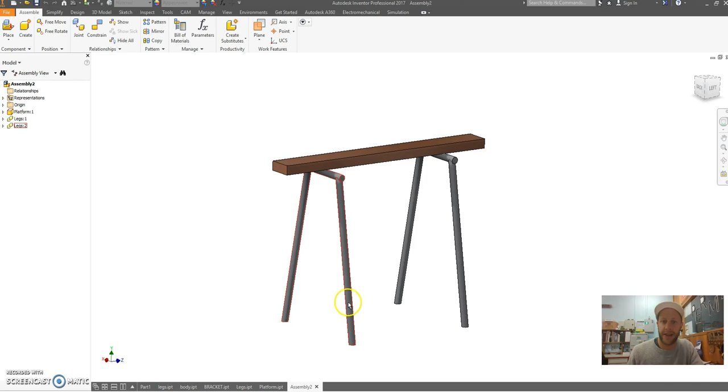This little video, I'm going to show you stage 2 of building our trestle stand. Okay, we've got the basic detail here. Now we need to start increasing our detail. Let's grab the platform. What we're going to do here is add some holes to this.

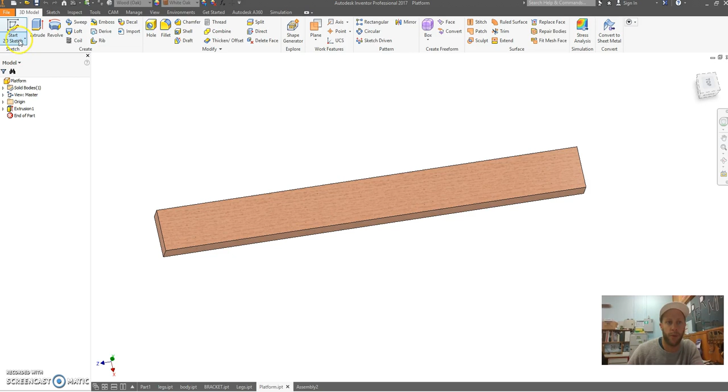So on our model here, there are some holes. Now, because there's a larger hole at the top and a through hole which goes all the way through, that's actually called a counter bore hole. So we're going to create a counter bore hole. Okay, start with a sketch, choose your top face.

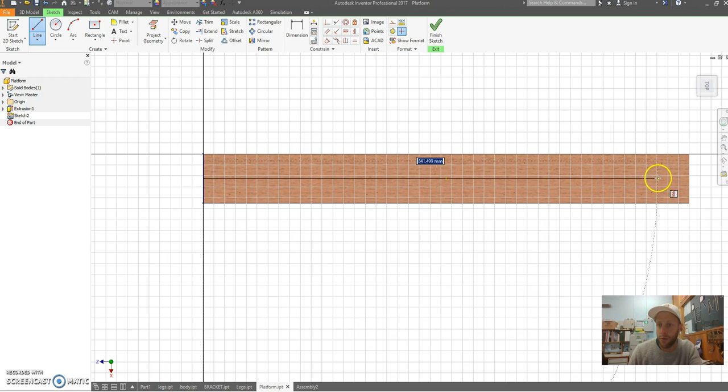Now I always want this to be along the center line, so I'm going to get a line and I'm going to create a reference line so I can snap to the midpoint of this, run it all the way to the end, and also a line through the middle.

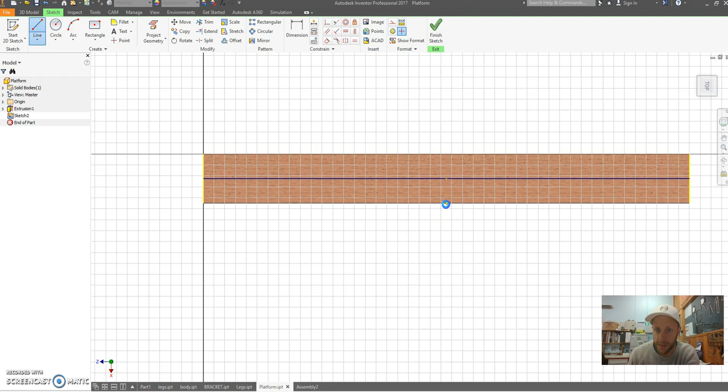So press escape to get out of there. Now that one didn't quite work. You've got to make sure that when you're creating your center line that it snaps to the green point. There we go. It should change the color to tell you that it's constrained. Okay, right click construction, click on the screen, right click construction, click on the screen. Now this gives us some reference now to do our holes.

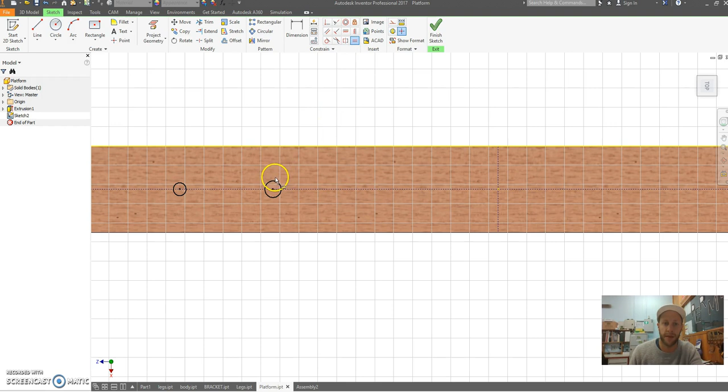So I'm going to do a hole on one side, so on the center line here and another one here. Now use the equal constraint to make these two holes the same, so equal and equal, and this hole is going to be 8 millimeters in diameter, and the distance between these two holes, center to center, is going to be 65 millimeters. Beautiful. This is a symmetrical part.

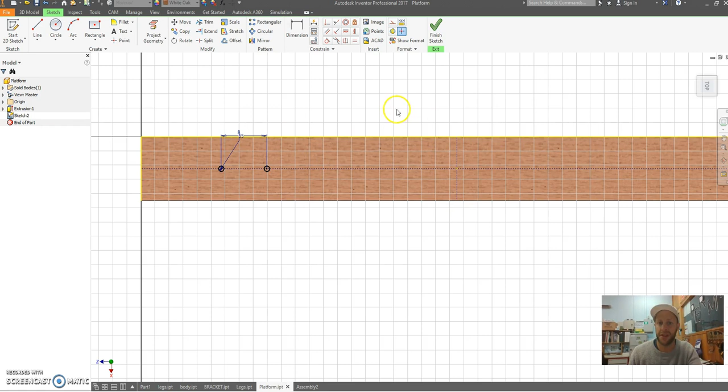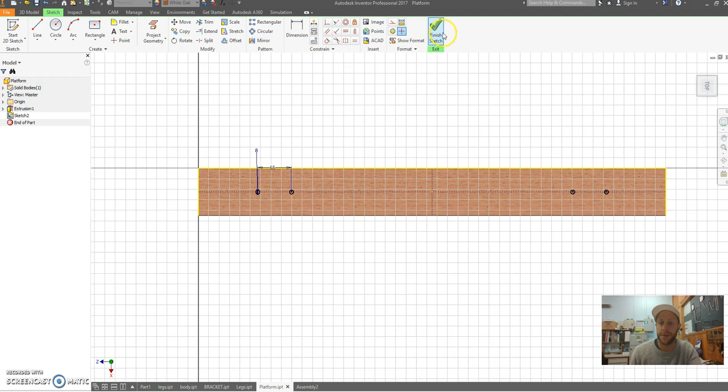So the reason why I drew this center line here is that I can now do a mirror. So if I click on mirror, this is the bar here. So I want to mirror this circle and this circle. Click on mirror line. I'm going to mirror about this center line and press apply. And hey presto, I get beautiful holes. Finish your sketch, extrude.

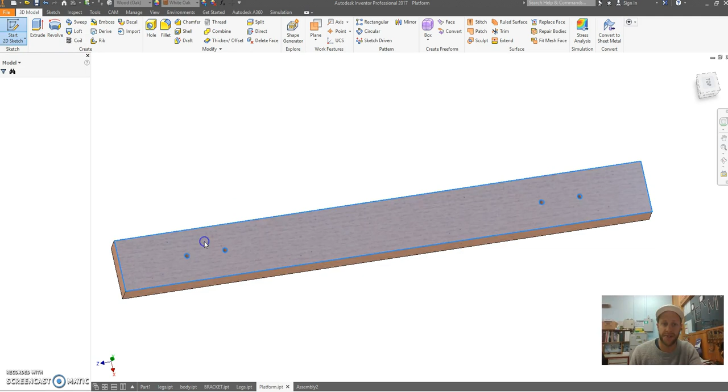So you can click on your 4 holes that you're going to extrude, and I'm going to make them a cut, and I'm going to go distance, I want to go all. It's going to cut through everything. Okay, excellent. There's my 4 holes. Now to do the counter bore, I'm going to do another sketch. Now that these holes are here, life is a little easier.

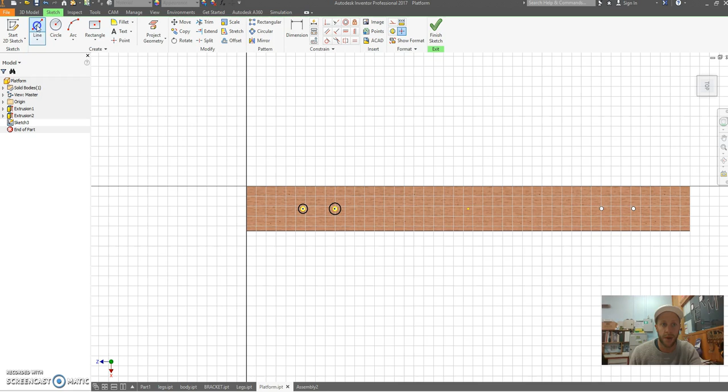What I can do is I can snap now to the center line. If you hover over that circle, you should be able to click on the center and then draw your circle. So hover, click on the center and draw your circle. Now again, it's symmetrical. So to help me, I'm just going to draw a center line from that point there. I'm just going to draw up into space. Make sure it's vertical. Doesn't really matter that this line goes off into space. Just make sure that it's vertical. So click on it and drag it.

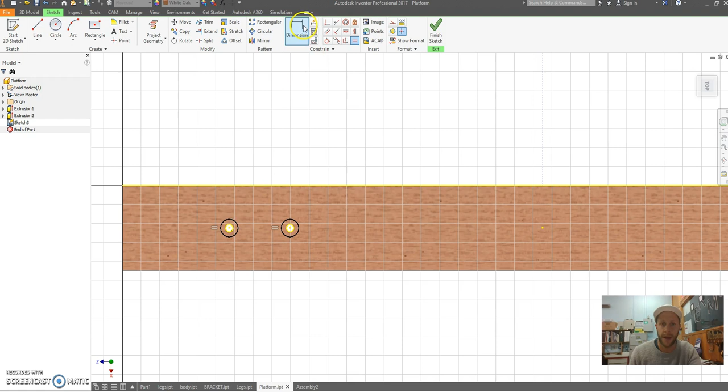Again, right click construction. Now I want these two holes to be equal, and I know that the diameter is going to be 20 millimeters of this counter bore. Okay, don't forget our mirror, circle, circle, click on your mirror line here, I go apply, and you should have nice 4 circles. Finish, extrude.

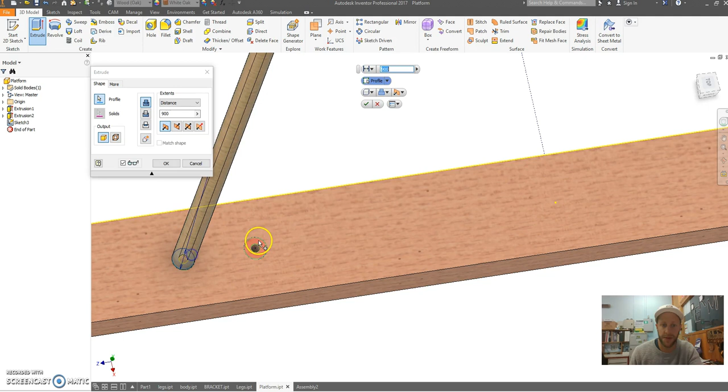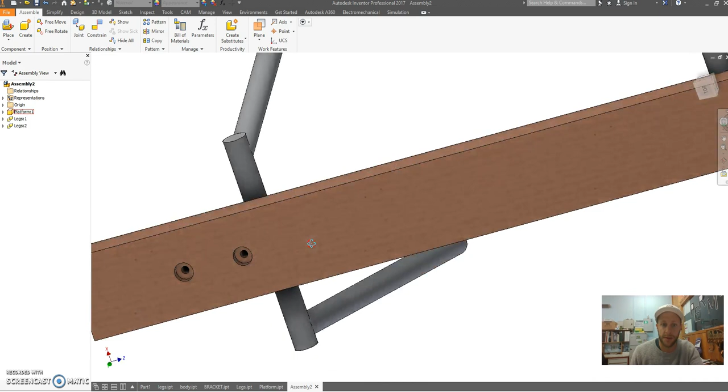Now again, we're going to use these 4 outer holes. Make sure you click on cut, and these, according to my drawing, are going to be 7 millimeters deep, and go OK. And there we go. There's our counter bore holes. Save your part. Let's go back to the assembly and have a look. All right. So those counter bore holes are on the top, which is correct.

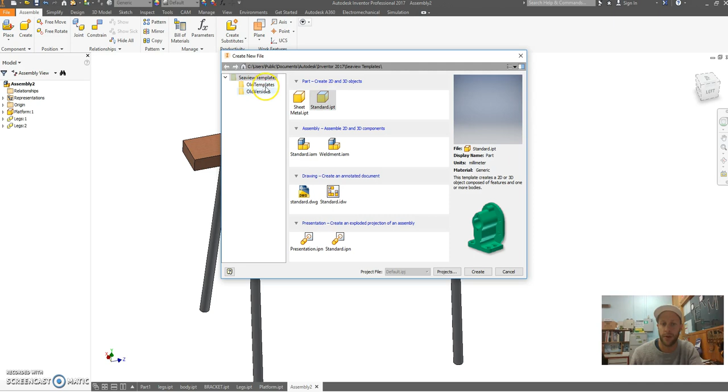That looks good. Okay. Next, I'm going to model up a little bracket here. So this little bracket is what is going to hold the legs in place. So let's model that. So we've got to create a new part. File, new. Always check, as I tell you, that you've got a standard. Yours might look different to mine. Just double check it's got millimeters. You must have millimeters as your part.

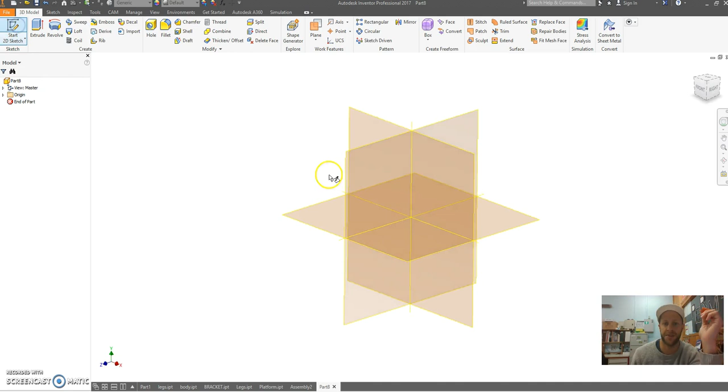Let's create it. Now, for this part here, always good to have a look at your model before you create it and go, well, what's the easiest way to build this? This for me is a single easy profile from the side. So I'm going to build a side profile. So let's start with a sketch. Click on a plane.

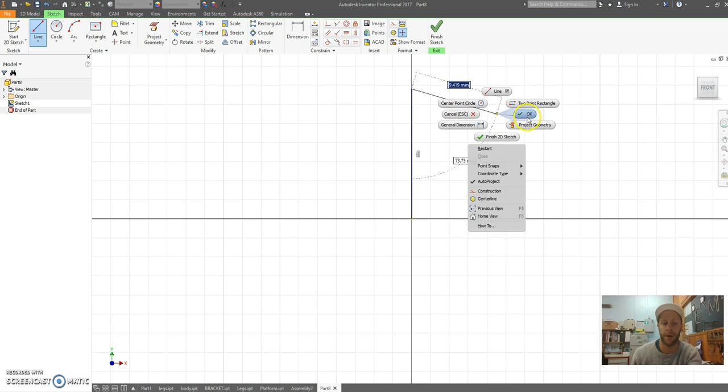And let's start. So as I always recommend for you to do, for parts symmetrical, let's make life easy for ourselves and model it around a center line. So I'm going to draw a center line, make it a construction line. Now I'm going to draw along this axis, this detail here. I'm just going to draw it like a rectangle for starters.

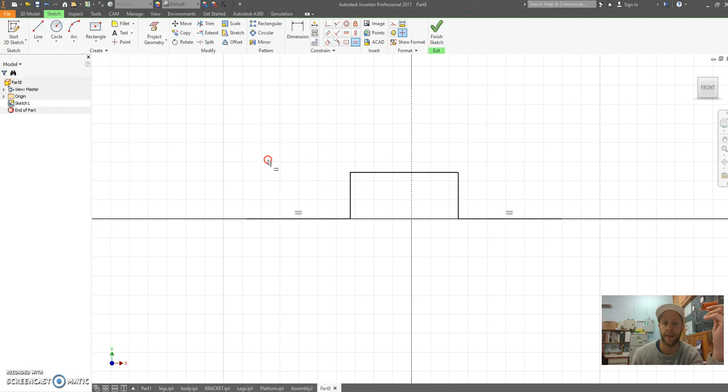Now it's a little hard to see with my black center line there, but I'm going to make this line and this line equal. This one and this one equal. No, it's already got that constraint. Beautiful. So I can move this around now. Now that kind of looks right, except the top bit's an arc. So I'm actually going to model in an arc. So put in your arc. This line here, you can make a construction line now.

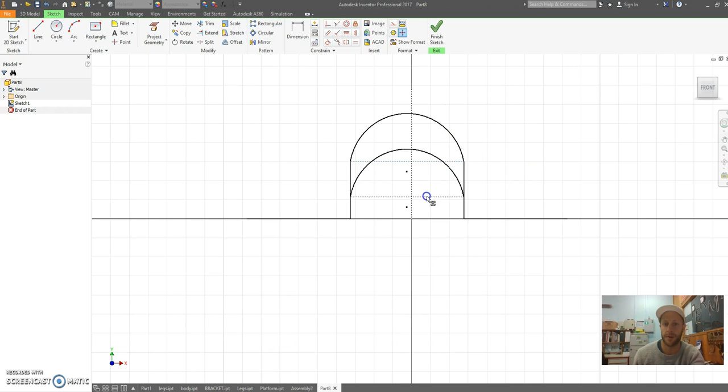Now, one thing with an arc, if you zoom in here, you'll notice that there's a sharp corner there. To make that a nice continuous curve, there's a little tool here called the tangent tool. And this makes a line touch an arc. So if you click on those two, that one and that one, you only have to do it once. This gives you a nice tangent arc.

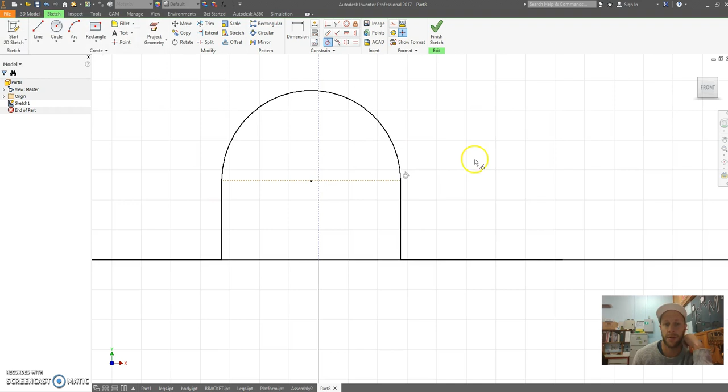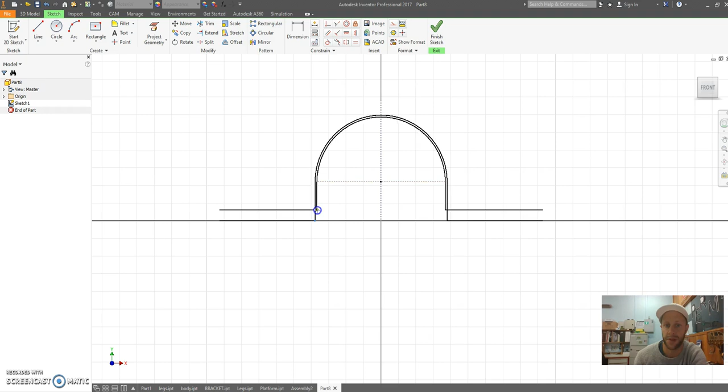Okay, beautiful. Now I'm going to put this point here. If I use the coincident constraint, this will attach a point, this point here, midpoint, on this line here in the center. So that now should be fairly centered. So you can always drag it and see what's going on.

Now this line here, I want this all to sit along the center line here. So I'm actually going to draw another reference line. I'm going to draw a line from here to there. Now what I can do is I can make that line there horizontal. Escape, make it construction. By making that line horizontal, my part is now nice and symmetrical.

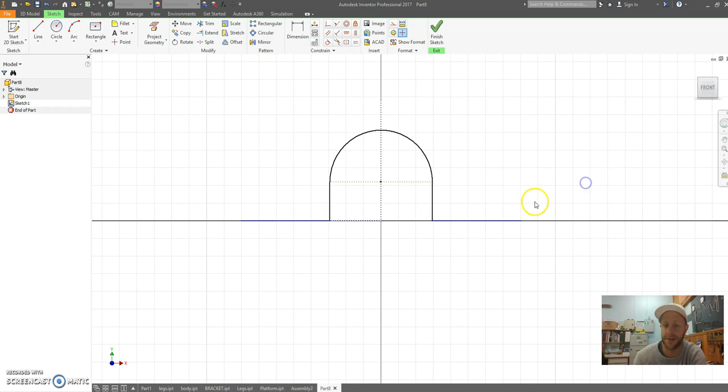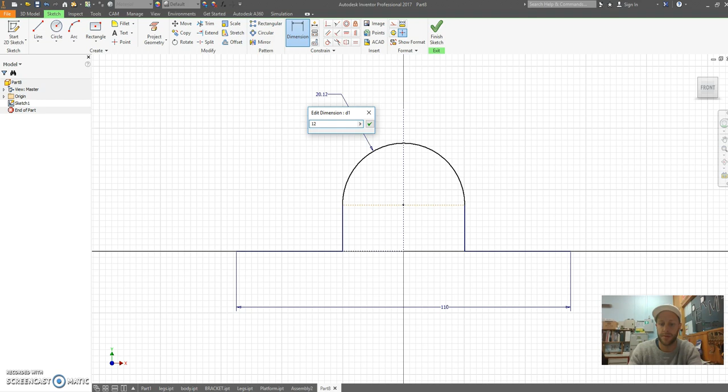All right, let's put some dimensions on. I know that my overall part length from here to here is 110 millimeters. That scales the whole thing. This arc here is going to be, it's 25 mil diameter on the inside, so I'm going to make this 12.5 as the radius. That should be about right.

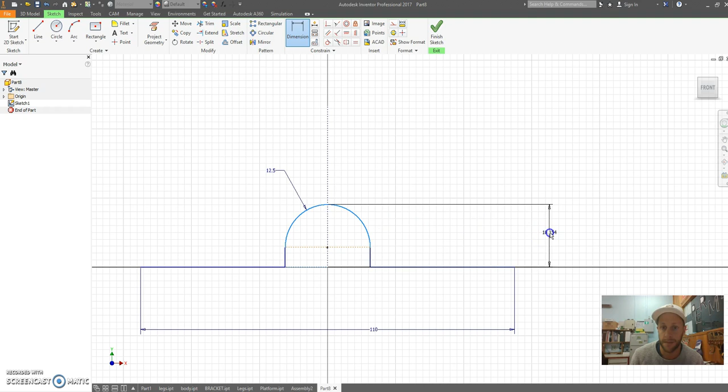And this I'm actually modeling on the inside of my shape. So if you see my screen here, I'm modeling the inside line. We'll see what we'll do in a sec. What I'm going to also need is a dimension from here to the top of the arc. And I've measured this one here, and it's going to be 25 millimeters from there to the bottom. Beautiful. All right, then my overall dimensions. Now these all change color, so they should be constrained.

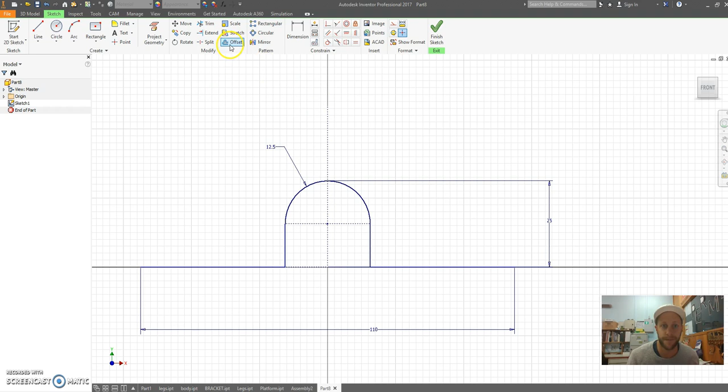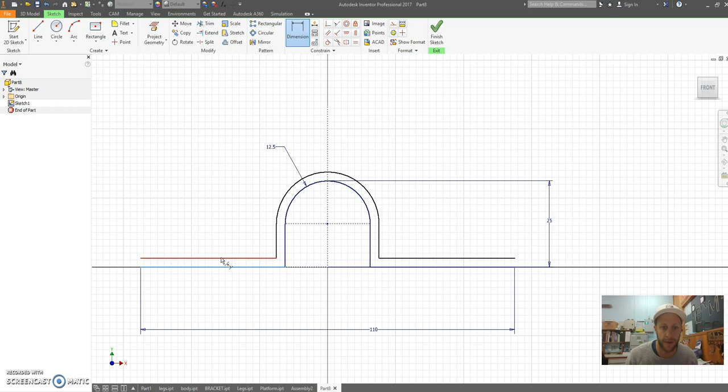Next step, I'm going to offset this line here. So I need this to be a solid. Click on offset. Now that this is all constrained, if I click offset, you will see that I can build the thickness of my part. Now I didn't actually measure that. I'm just going to quickly run my verniers across. This is 2 millimeters thick. So what we can do is just click, then press a dimension, and I'm going to go here to here and make it 2 mil thick.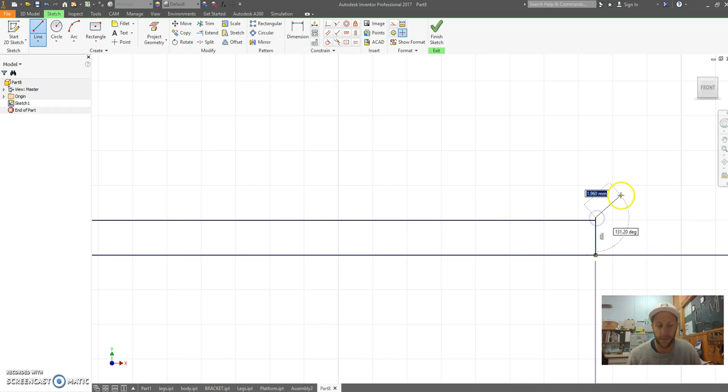Now, you'll notice that this beautiful offset is perfectly offset from my inside line, but I need to close up these ends because it's not a closed loop. So I can just draw a line between there and there, and at this end, between there and there, whoops, missed it. Just escape and go back. Line between that endpoint and that endpoint. Excellent. That's all closed. I can extrude this.

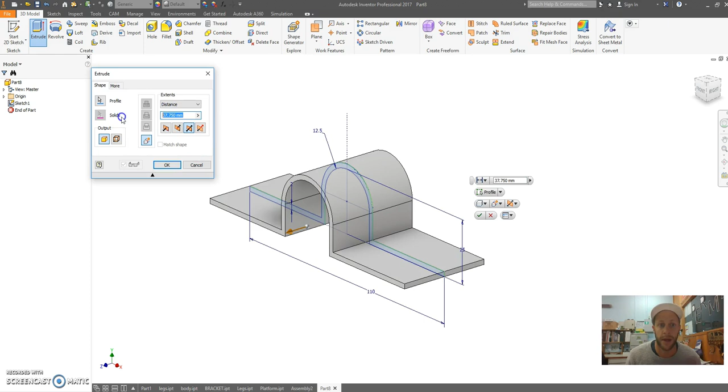So finish your sketch, press extrude, and we can make this. I like to make it mid-plane, and we're going to make that, how big was it? It's 50 millimeters.

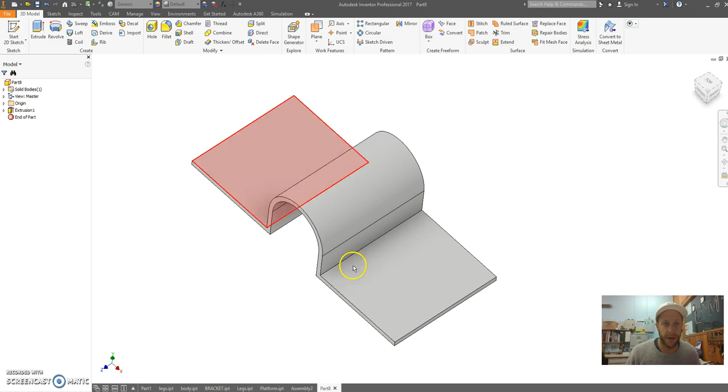Beautiful. Brackets coming together. Now, you'll notice that on this one, it's got a nice arc on the inside. I'm going to add that as a secondary feature, and on the inside it's about 10 millimeters. So I'm going to fillet it. I'm going to do a fillet of 10 and 10 on the inside here, here and here, and I'm going to make it a 10 mil radius.

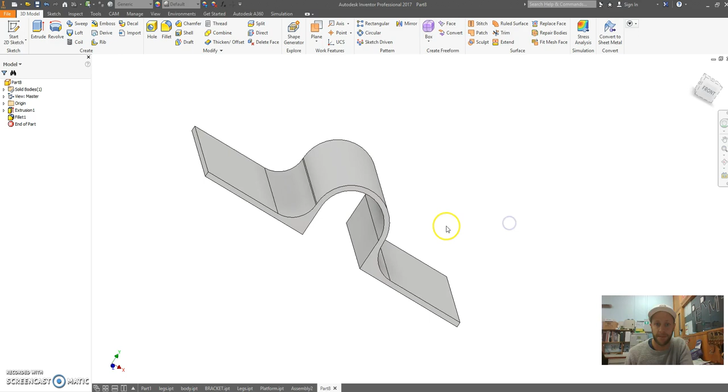Whoops, stuffed it up. Right click, edit feature, 10 millimeters. Okay. Now the inside should be 10 millimeters plus the 2 mil thickness. So that's going to be 12 millimeters from this corner. So click on that edge, and okay. Now that looks pretty good.

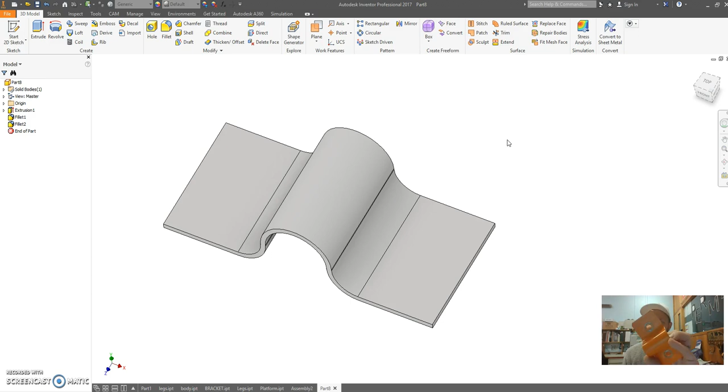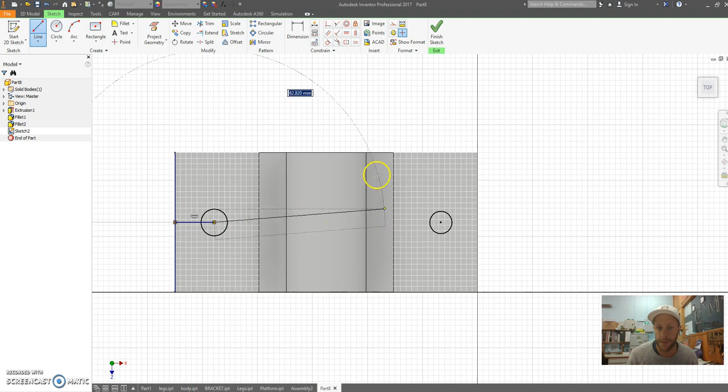Now, next thing to add on my design are these holes. So I'm going to do a sketch on the top. Now, I'm just going to model 2 rough holes out here. And to help me constrain these, I can draw some construction lines. So I can pick up the center line here and draw it to there. Escape. I can draw a center line from here to here. Also make that construction, make that one construction.

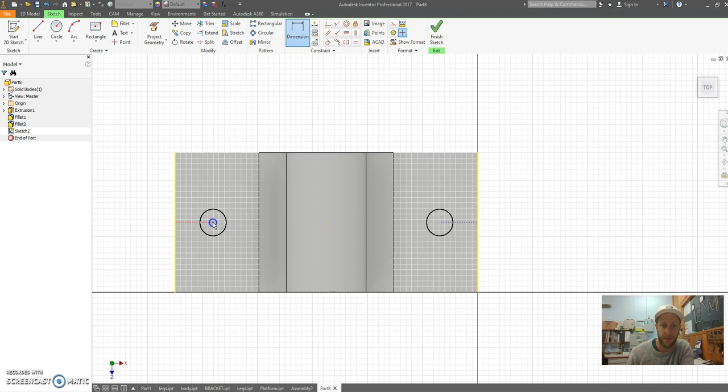Using my geometric constraints here, I can say that I want this hole and this hole to be equal. I want this line and this line to be equal. And this is starting to take shape. Dimension from the center of this one to this one. This needs to be 65 millimeters to fit up with my other design. So just double check, 65, yeah. That needs to fit into our timber.

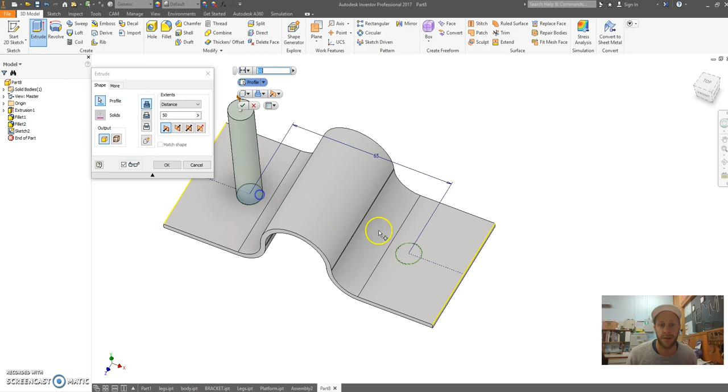So 65, done. Extrude on this hole and this hole. I'm going to cut it. I'm going to go through all. Done. Beautiful. This part looks almost the same. It just has a chamfer in the corner. So you can go and add a chamfer. You can check the model. That should be in those corners. I'm just going to leave it off for today.

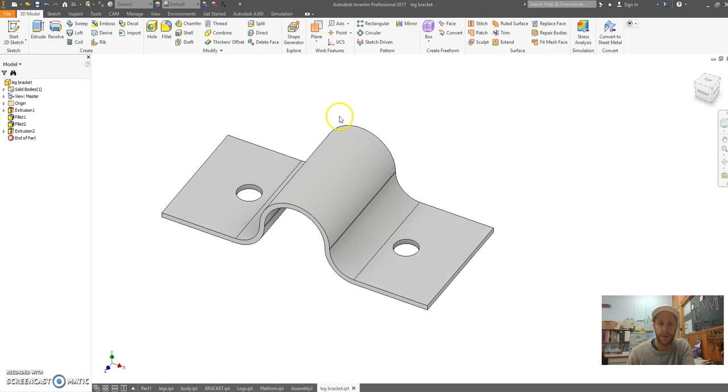Save your file. So make sure you put it in your correct area. And this is going to be called, it is a bracket. I'm going to call it leg bracket. Beautiful. You can change the color as we showed you earlier. And now I'm going to add this to my assembly. So I can place this in now. Leg bracket. Okay. And I can put 2 of these now into my assembly. Excellent.

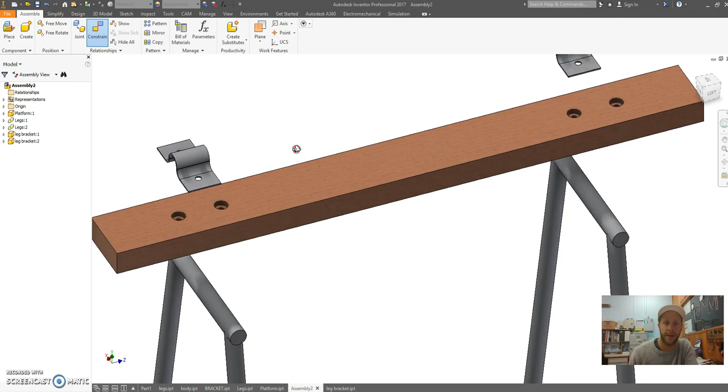Almost there. So the idea of these brackets is that they're actually going to hold in place your legs. So what I can do, I can start applying some constraints in my model. So the first constraint I'm going to add is going to be on the inside of here of a bracket is this radius, and I've also got this radius here. So if I click on the 2 surfaces, you'll see that it's going to fix that bracket upon the same center.

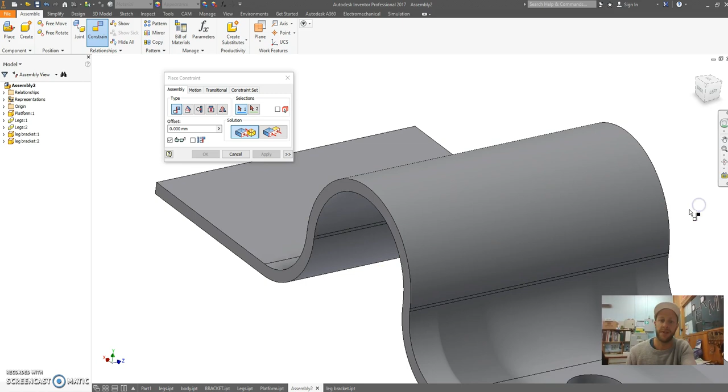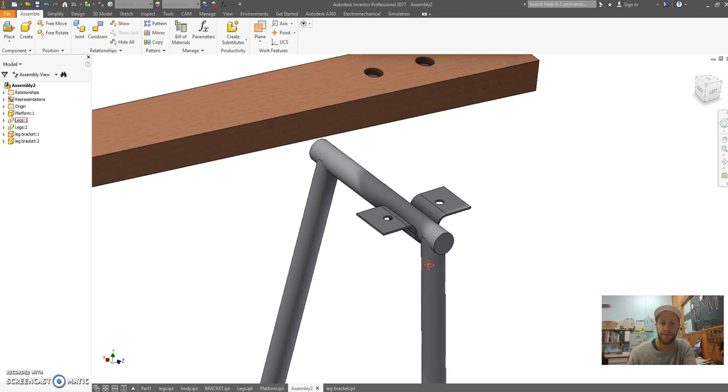So what this is doing is it's grabbing the center of this arc. You can see this little line here as I hover over it, and it's getting the center of that thing there, and it's going to fix those together. So go OK. Now what? If I move this around, you'll notice that that bracket will flip itself over. Sweet. Looks good. Flips itself over. Alright. Now, this is getting closer to where I want to go.

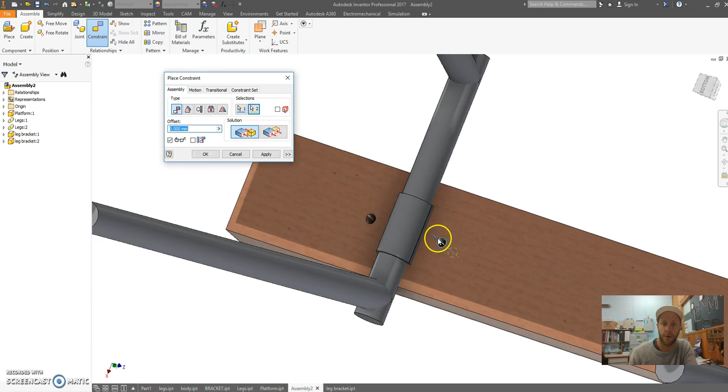If I roll this over now, what I can do is I can put a constraint. Now, I want to make the center of this hole. Please avoid clicking on an edge. You must choose the cylindrical face. And you can click on that hole there. Apply. Now, what you'll notice is that this has gone inside it. But that's looking pretty good.

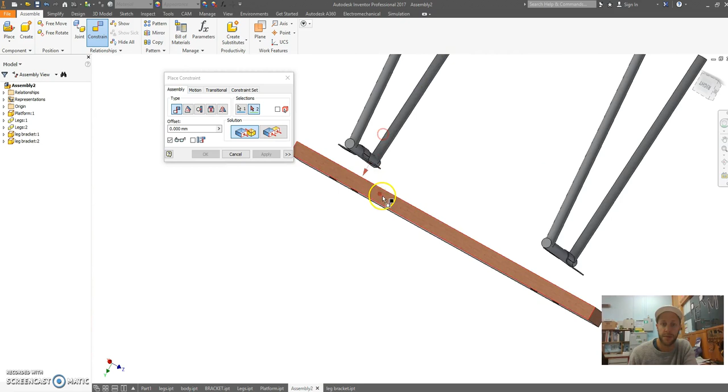So these things are moving around a little bit. I can also put a constraint from this face to that face there and go apply. And hey presto, all of a sudden my leg fits in there and rotates. You can see still that this thing moves left and right. That's because I'm missing a few more bits to hold this together. But your leg is now constrained with your bracket.

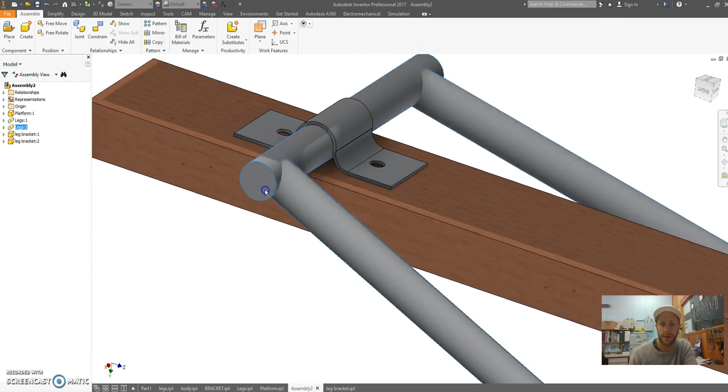Whee, cool. Now one thing you can do in here is if you right click on this platform and make it grounded, that's going to stop it from rotating. And there we go. Fix the other side.